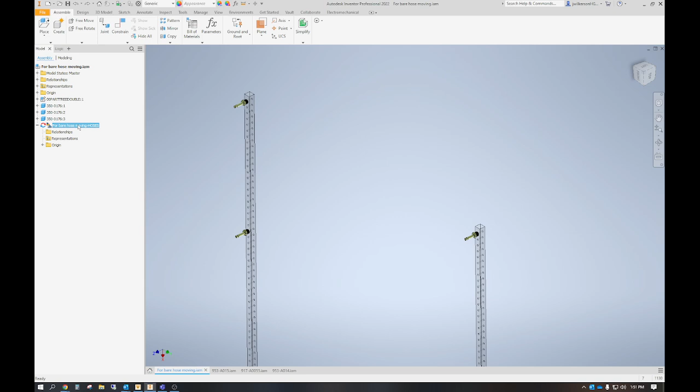We're going to go into this assembly. We're going to select some type of bare hose here. We'll get a fuel hose, that's what goes on these fittings. Create a pipe run. I'm going to skip some steps here that are important, but you should know how to make hoses.

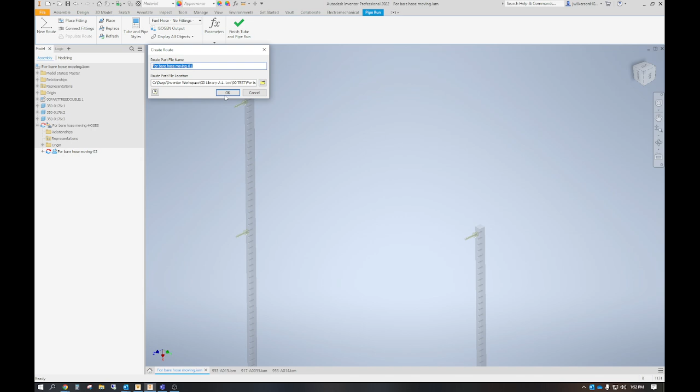So we'll go through this. Okay, so we're going to put this fitting on here. These go on a lot like a hose with a fitting. So let's see if I messed that up. Okay, now you say, oh no, the hose is on there backwards.

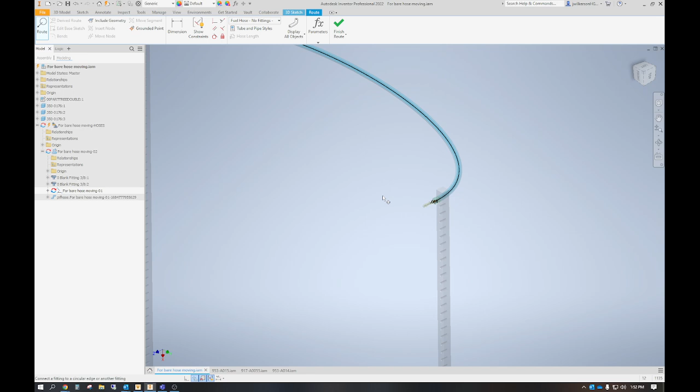Well, this is a glitch, I think, but I'm going to show you how to fix that, and I'm going to show you how to move them. So we're okay with all that. So we're going to fix this one first. We're going to go here while we're in the hose assembly. Okay, we're going to do a right click on the first fitting, delete all connections.

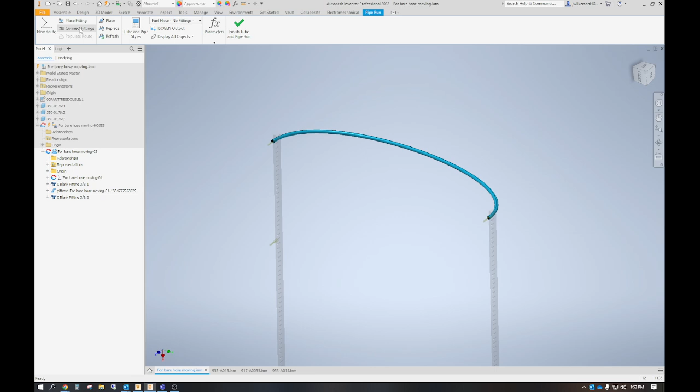I'm going to go up here to connect fittings. We're going to select the hose. You'll notice which way the arrow is turning. Okay, now I'm selecting the fitting, but you notice the arrow is going opposite. Okay, we want that hose to turn around, so we really need that arrow to go the other direction. So I'm going to hit the space bar, and then I'm going to hit enter.

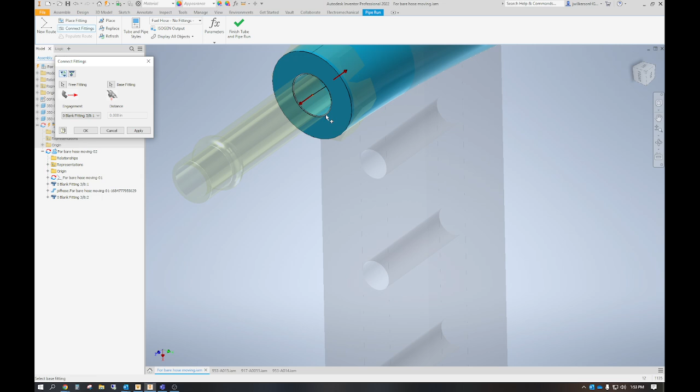And it probably selected something different for me, so let's cancel that and do that again. So we're going to pick this, and we're going to hit the space bar, and that flipped it around. We're going to hit apply, and there you go. Now the hose is correct.

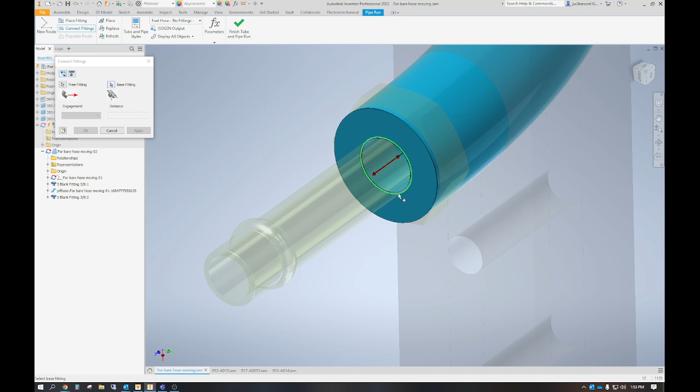And we'll go ahead and do the same thing here. First we've got to delete connection. I'm going to hit connect fitting, grab that, grab the fitting, hit space bar so it'll reverse it. I think you can right click on that too. Okay, and then hit apply. And there we go. Now you'll notice the hose is on the fittings.

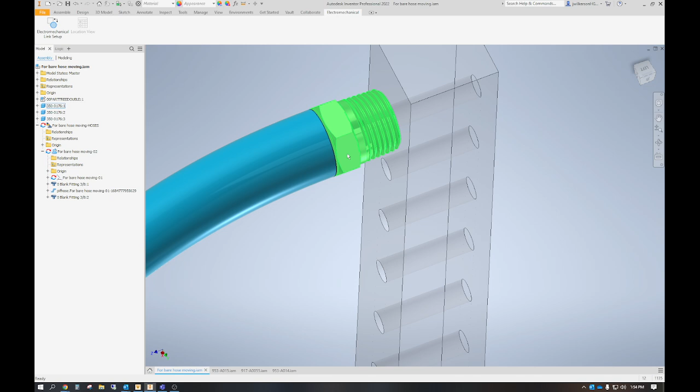So we'll finish that so you can take a look at it. And you can put a hose clamp or something. I highly suggest, if you put the hose clamp, to constrain it to the fitting, not to the hose. Okay, just a little note there.

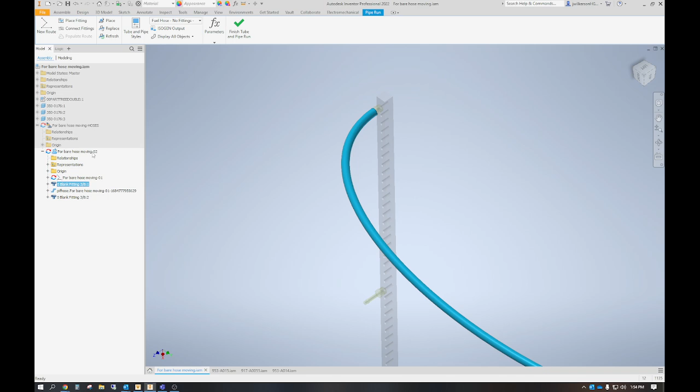We'll go back in here. We'll move this hose. We're going to move this from here to this fitting. So again, we're going to open the hose assembly, do a right click, go to delete all connections. We're going to hit connect fittings. I'm going to grab the hose. You notice the way the arrow is pointing, and we're going to do that.

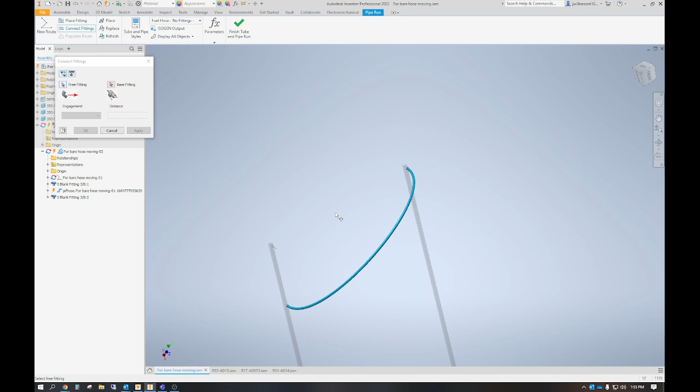We're going to hit the space bar because we want them pointing toward each other. Hit apply, and there you go. And that is a really easy way now to fix bare hoses and treating them much like a regular hydraulic hose with a fitting. So there you go. Hopefully that's helpful. Thanks.